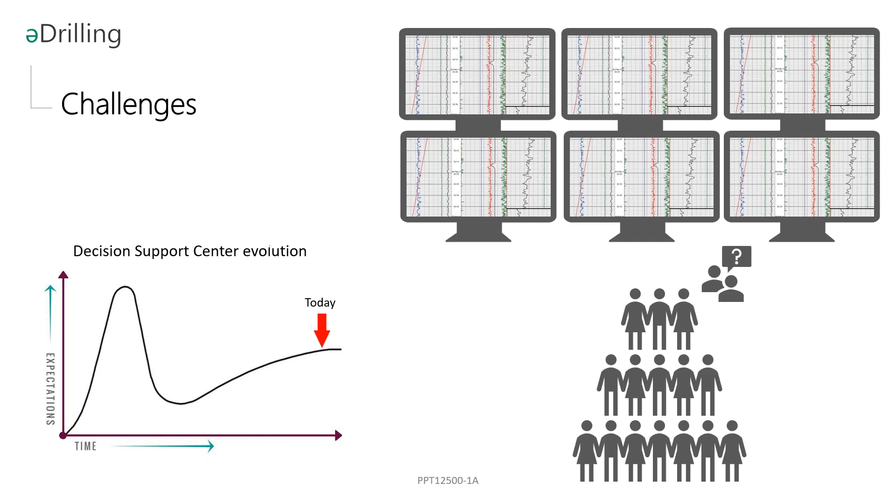But today, in many cases, it's all based on human intelligence, where these rooms and centers consist of advisors or experts looking at the data or squiggly lines and deriving conclusions based on their experience, which means there is a human factor element and uncertainties when taking decisions. In addition to that, it is not easy to detect issues beforehand, such as stuck pipe or influx or packoffs.

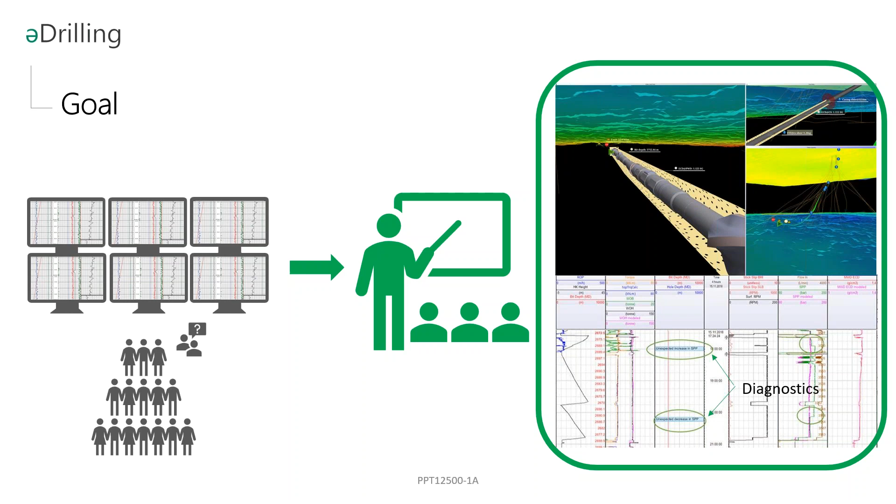So this is why we have been helping our customers to move from their existing setup. You want to have your people work on higher value tasks than monitoring data and looking at a data screen, with computers and software monitoring your well and providing your people with intelligence, with symptoms, diagnostics, and advice, such as first actions and optimal parameters. And the objective is to enable them to provide better decision support.

Today, we have a global experience with customers using the e-drilling software in North and South America, Europe, and Southeast Asia as well. And each one of them has, of course, a different approach with regards to the way of working and using the software. But the outcome is actually the same. Our technology has contributed to a radical improvement of quality and well-delivery decision-making. We will cover in the examples some of these approaches or models from the different experiences we have with our customers. But before that, I will let Morten give you a technical overview of our technology. So over to you, Morten.

Thank you. So to be able to deliver an advanced decision support system, we are depending on a strong and proven technology. And if we think of it, it all starts with the actual well, which can be described by many parameters: formation properties, temperature gradients, pressure window, and then we add the drill string and BHA, drilling fluid properties, casing designs, and also the rig properties. Together with that, we also have the actions performed on the rig, or the real-time signals showing the movement of the string, flow rates, and so on. All this information we use to create a digital twin of the well.

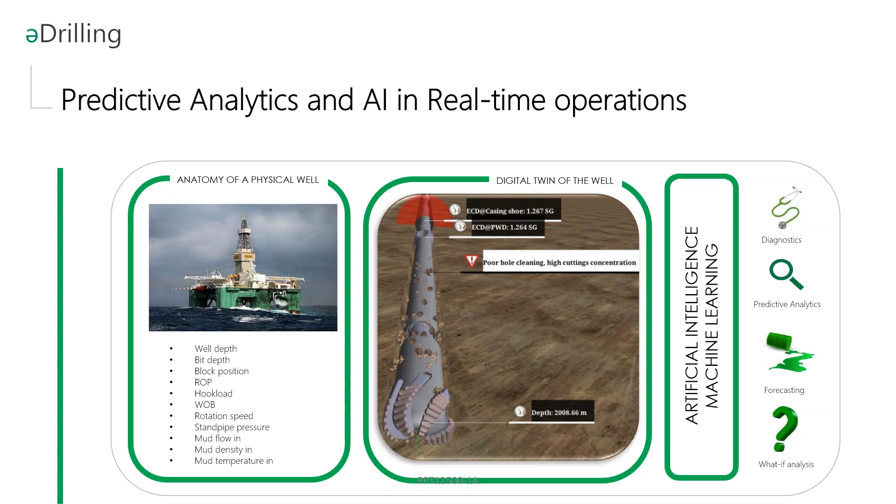So we got a lot of questions from all different places about the artificial intelligence we do. And the way we do it is what's called model-based reasoning. That means that we have a model where we model what's actually happening in the well, or what should happen in the well. And we compare that to the behavior or the observations from the actual well.

That allows us to not only look for patterns, and you know patterns of different events may be different in different wells and with different equipment and so on. Then we are able to actually compare what's happening with what should have been happening.

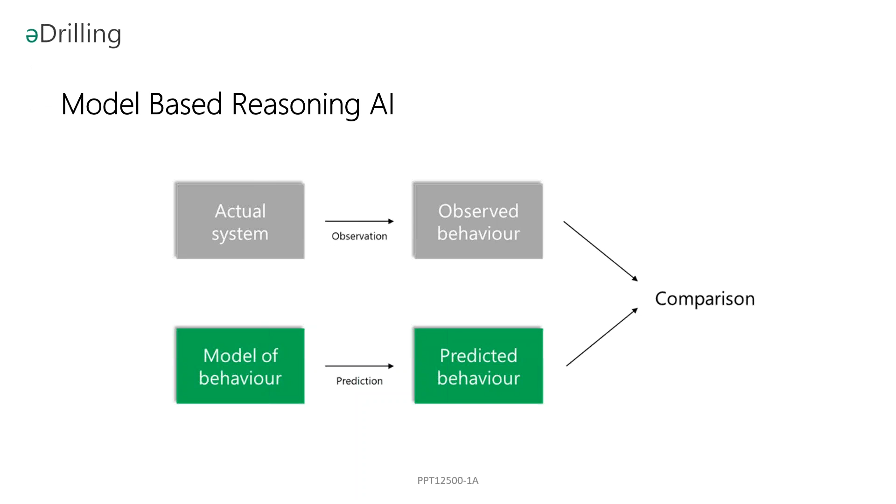So just some examples of the diagnostics, or what's actually coming out of our analytics, because this is what actually gives the value we want to use. We have a big focus on the typical potential drilling events. This can be, of course, well control things, detecting potential influxes and losses, also surge and swab, and also other things like stuck pipe, poor hole cleaning, pack-offs and so on. And all these things the system actually monitors all the time to make sure something really bad is not happening.

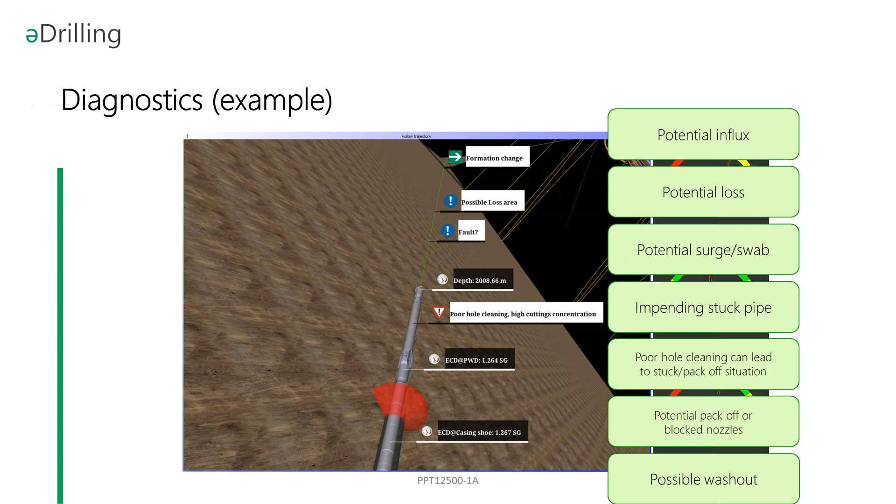So we would like to talk a bit about the different models or the different ways we implement this kind of software into the different operations. So we have given them some kind of names. We have the first way, which we call the live well support model.

In this case, it could be eDrilling that runs the decision support software and interacts with the operational team. It could also be one of our partners, or it could be some people in the organization doing this. The result is that eDrilling or the people running it are advising the operational team during the operation. The original operational team can focus on their normal routine tasks, and we don't need to change very much on who is responsible for what.

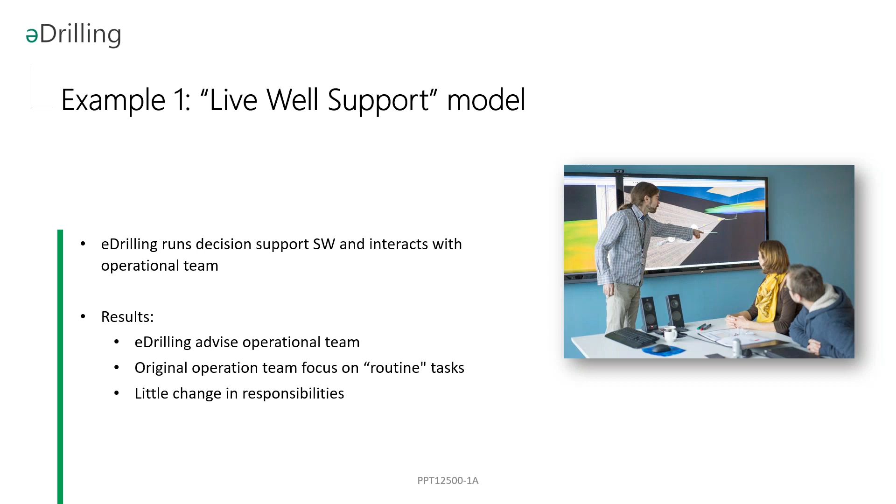Then another way of doing it is what we can call a mission control center, where you actually have a real-time center using this software to help the operation. In this case, we would have some assigned super users. The people in the center would have full software ownership and do regular communication with the provider, of course, but also do the communication with the rig site, supporting them in their operations.

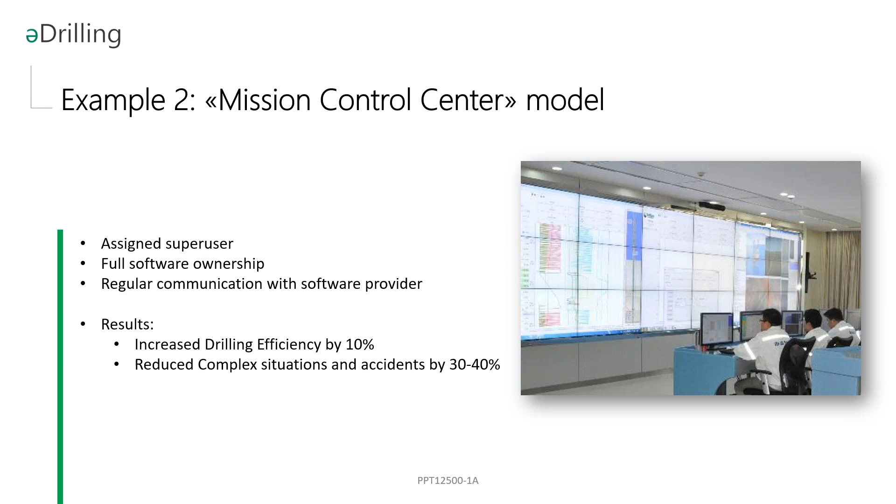As a result of this, these are actual numbers we got from one of our customers doing this. They own the application, they have bought the software license and use it in their real-time center. And they have seen that they have increased the drilling efficiency by 10%. And they have also reduced the complex situations or accidents by 30 to 40%, which is actually giving them a lot of value.

Then we have a third approach, which we call the hidden model. In this case, it's a service provider that uses the decision support software in their normal service. Their focus will be to increase the quality of their own service. And the rig team may not even know that the decision support software is used at all.

So the result is that it gives the service provider better service delivery. There could be many examples of this, but we have MPD companies using our software in their MPD control system to help them do the MPD operation correctly. It could be a mudlogger company using our software to assist the mudlogger to perform better and detect things earlier than he would normally. And it could also be a normal data aggregation service which needs to add some more value in their daily work.

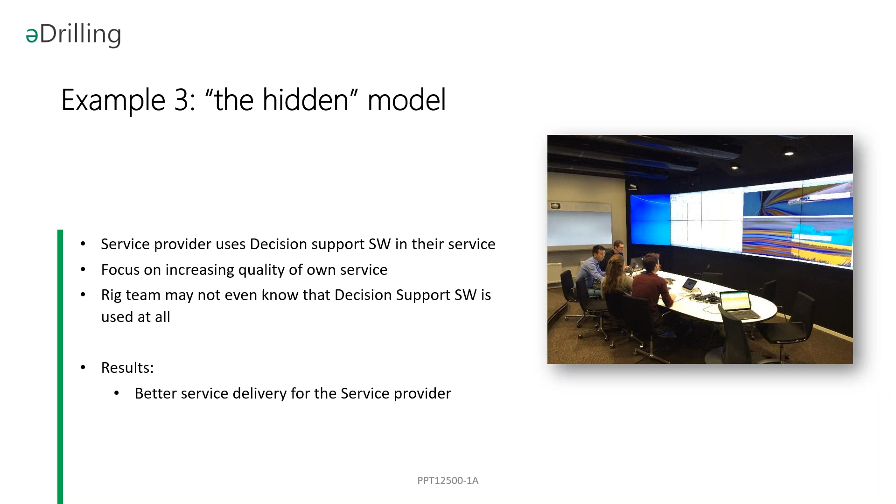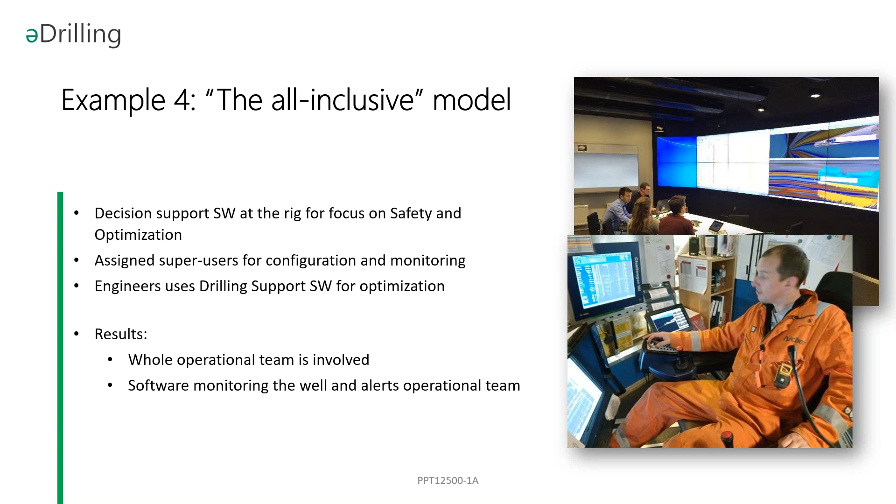All right, thanks, Morten, for all these examples. So I believe it is important to remember and highlight these key takeaways. One is find the model that fits you and fits your work process. At the same time, you need to think differently and build on what you have. You can upgrade and change your thinking. For example, if you have one person monitoring one well, you can upgrade to have this one person covering 3-4 wells, for example, with our technology.

And this is, again, not only about freeing some space in your company. We all know AI doesn't replace human intelligence, but here it's all about being proactive and helping humans take better decisions. Another critical point is to clearly define roles and responsibilities with respect to the operational communication, but also to have a full ownership of the software to make it an active part of the operation and bring value to you. That also includes ensuring all the data sources to run the software are also correct and updated all the time.

So now moving to the IT infrastructure, some of you are probably wondering about it. So actually, some of our customers run it in their own data centers, but we also have other customers who run the software in the cloud, for example, in Amazon Web Services or Azure. And the solution we provide is based on Kubernetes, which allows easier and better scalability and maintenance. It is also a secure solution with an integration with the customer AD controller and secure communication protocols between servers and clients.

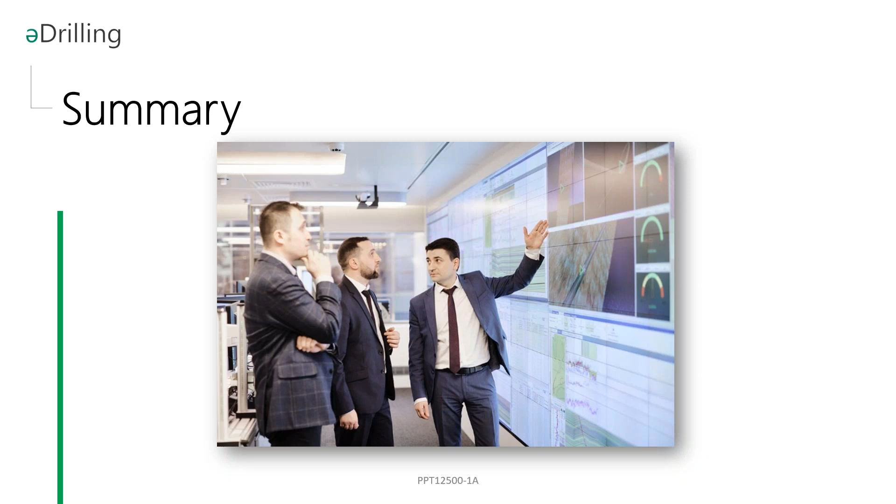So with that, we will conclude this webinar. And before, I would like just to say a few words. It's now time to move from people looking at screens and advising to having a digital advisory system.